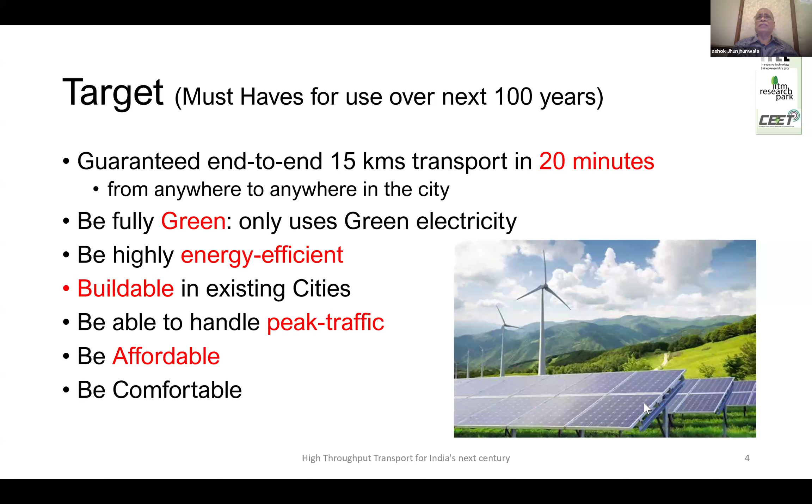So I'm looking at a transport system in 20 minutes, which can get you in the existing city using green electricity, highly energy efficient, and get from anywhere to anywhere in a very affordable manner. Almost looks impossible. But then it is the impossible that has to be made possible. Let me therefore try to present to you a solution which I believe can actually do this. We are calling this hashtag city, high throughput, autonomous, human transportation for India's next century. This is the kind of system that we really need to build.

What is behind this system? So for sustainability and comfort, we are actually introducing transport using pods. Pods are personalized, and in India, they will be air-conditioned vehicles. Maybe up to 2 passengers can sit in that. It should be comfortable, and this is the system which should be able to take us from anywhere to anywhere.

It should move on rails. Why? Because rails have low rolling resistance. It is 1/10 of that of the road. So anything that moves on the road will consume, as far as the rolling resistance is concerned, 10 times energy. We want to minimize the frictional loss, and therefore they should move on rails. And that's going to be the challenge.

The second, there are individual pods. Now, if the individual pods are moving at high speed, they will face fairly large aerodynamic drag. So we believe that these pods, which will be moving in the same direction, platoon with each other. They kind of join so that the aerodynamic resistance is faced mostly by the pod in the front, and much less by the pods which are in the platoon. And therefore, it minimizes the aerodynamic drag and therefore less energy consumption.

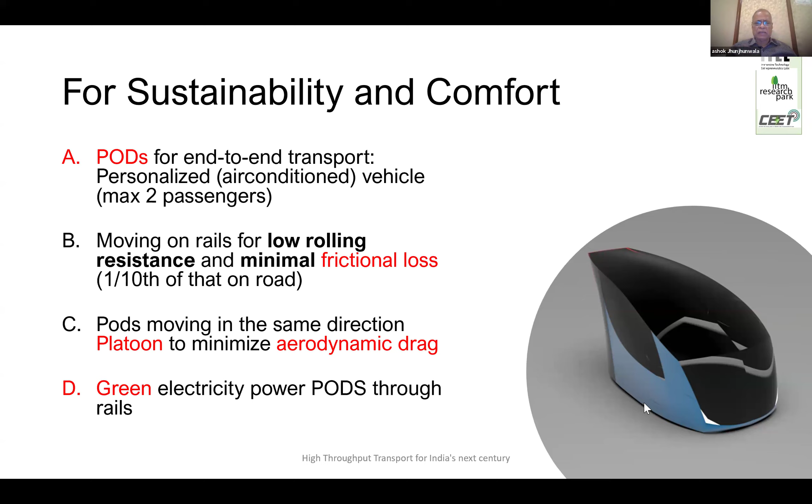Now, how do we really build this up? What kind of system are we talking about? We are talking about a dense pods transport system. We are talking about elevated corridors for transporting a single pod. Now, this pod's width is about a meter or even less than a meter. So it's a very narrow pod. Typically one person can sit, or two people can sit back to back. And therefore, it's a very narrow pathway we need to create on an elevated corridor, and I've shown here east-west and north-south, kind of forming a mesh network.

Now, the important thing is, since it's very narrow, this can be built on a narrow street as well as a wide street. Today, most vehicles try to travel on wide streets because that's where they can get speed. On a narrow street, they find it very, very difficult. But if it is an elevated, single pod, unidirectional rail system, then the pods on the narrow street can travel as fast as on the wide street. So essentially, we are looking at very narrow and wide streets, creating lots of paths for the pods to travel. And whether they travel on the narrow street or wide streets, they will have equal speed and capacity. That's the way they are built.

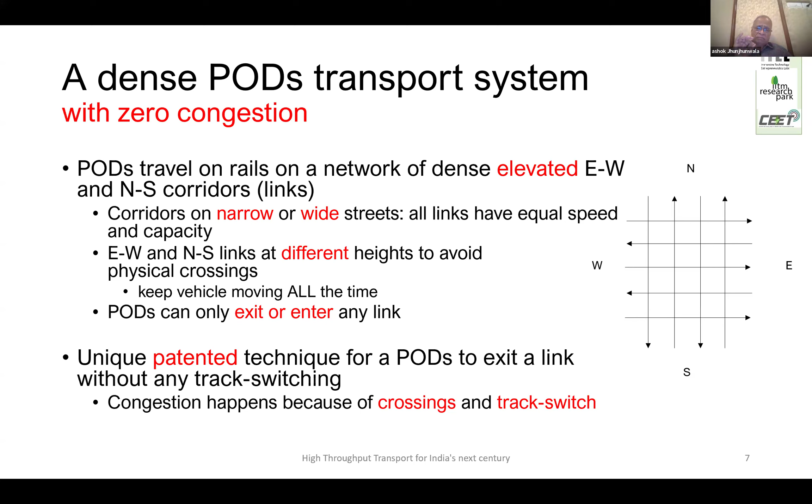We have come up with a unique technique where it is just like a car. When you are driving a car, you can just take an exit. Similarly, a pod can take an exit without any track switching. This is a very unique thing that we are able to do. And since we are able to avoid crossings and track switching, we essentially can keep on traveling at the peak speed. The pods are in constant communication with a centralized controller.

Now, these pods are autonomous. They don't have a driver, and there is a centralized controller which essentially gives them the route. There is a unique AI algorithm where, as soon as a passenger is to get onto a pod, the pod's route from end to end is decided. That is done by the centralized controller using an AI algorithm in such a manner that no pod will get into congestion.

In fact, no link will ever have traffic greater than 50% of the capacity, and therefore pods can continue to travel at full speed. Remember that they have to exit and enter another link. Exiting and entering will add a little bit of time, but otherwise they are just traveling at full speed. Pod journeys are autonomous once the route is downloaded. After that, pods are not controlled by the centralized controller.

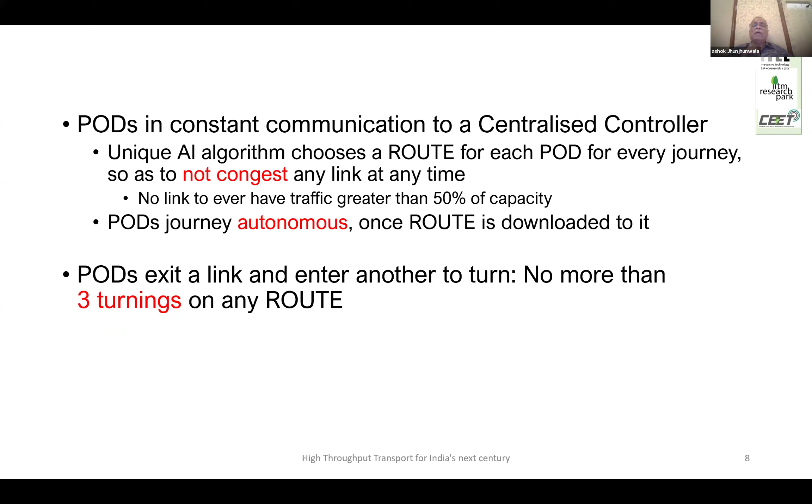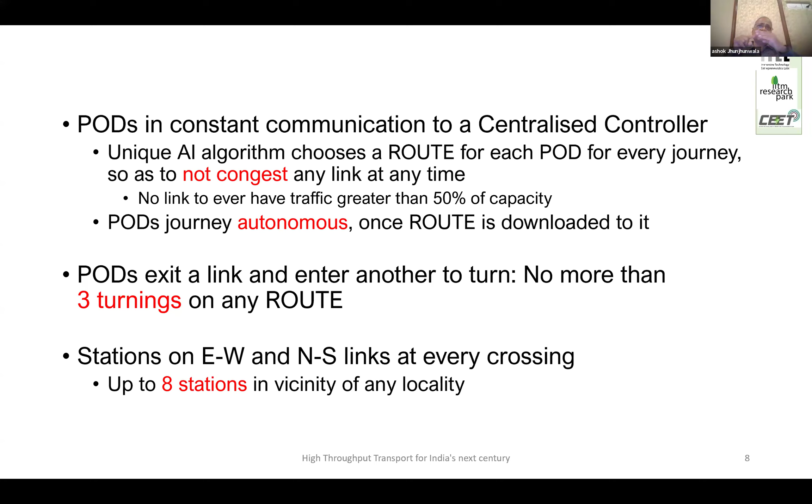Pods exit a link to turn. No more than 3 turnings on any route. We have put that restriction because any exit and entry does add a small amount of time, so we have set a maximum of 3 turnings. Stations are on the east-west and north-south link at every crossing. In fact, there are 2 stations at every virtual crossing. Remember, there is no crossing, but it appears like one, and there are 2 stations, one on the east-west side, another on the north-south side, and the pod can exit at either station.

So typically in a city like Chennai, 20 kilometers by 20 kilometers, we put a 30 by 30 grid-like rail network on existing roads. While we are showing them all as straight roads, it doesn't matter if they are curved or turn a bit. Basically, they'll form a grid-like structure at second floor height. Unidirectional, no crossing, equal speed and capacity on all roads, narrow as well as wide roads, and 2 stations at each node.

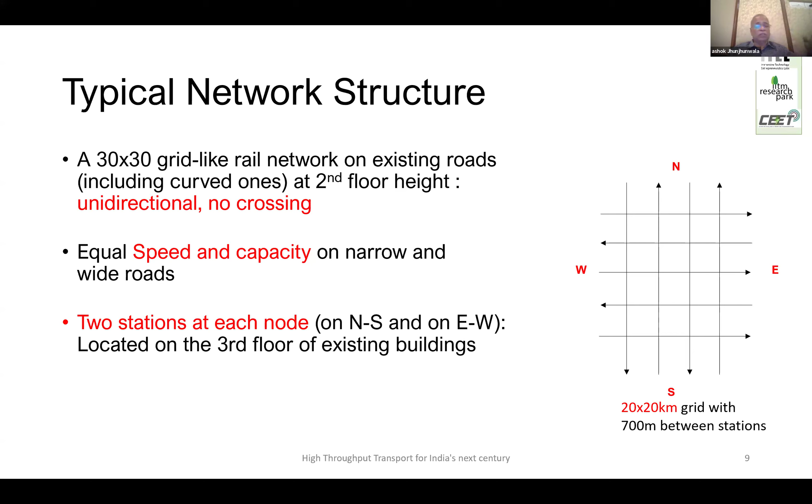The stations can be on a narrow road with buildings next to it, and one of the apartments in a building can be taken at the second or third floor of the existing building, which will serve as a station. So one will exit or enter a pod at the third floor of buildings marked to have a station. We are not talking about creating new infrastructure. You lease a flat in a building which has an elevator, so people can come to the second or third floor and enter or exit a pod.

We are talking about a user who, while leaving home, enters a destination on a mobile app. The app then figures out the complete route, communicating with the centralized controller, and directs the user to walk to one of the 8 nearby stations. Because wherever you are, there are 4 corners next to you, and there will be 8 stations. At one of the 8 stations, a pod will be available.

The user will be asked to walk about 300 to 400 meters, because the grid is 700 meters by 700 meters. This is the number we have chosen for Chennai. It is a 3 to 4 minute walk. The map will show the walking route, and as soon as you reach there, a pod is waiting for you.

A pod, then you enter the pod, and it travels 15 kilometers in 12 minutes. 75 kilometers per hour average speed. It goes up to 100 kilometers per hour. And in 12 minutes, it's able to reach a destination, 15 kilometers. And then again, 3 to 4 minutes walk to your office.

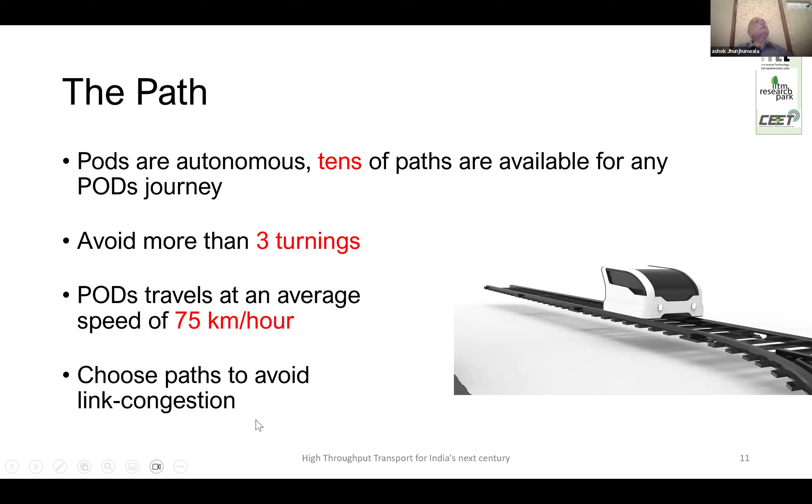So since stations are basically within 300 to 400 meters of every location in the city, this is made possible. As I told you, pods are autonomous. Tens of paths are available for any pod journeys. We'll show you. And avoid more than 3 turnings. Pods travel at an average speed of 75 km per hour. And the key thing is to choose a path to avoid link congestion.

So there are a large number of routes. There are actually many more routes. At least 10 routes. And if you allow 1 or 2 extra links, these are all equidistance links, probably there will be about 30 routes. Now remember that each turning adds to travel time. So for each route, a weight will be assigned. And the weight will depend on the congestion of that link. Each link will have a certain congestion.

Based on the congestion, a certain weight is assigned. And for every turning also a certain weight is added. And basically the problem at the central controller, it minimizes the weights of a route. The route which minimizes and ensures that not a single link is ever congested. In fact, if the link capacity goes more than 50%, the weight of that link becomes very high. So that link has to be avoided till it is freed.

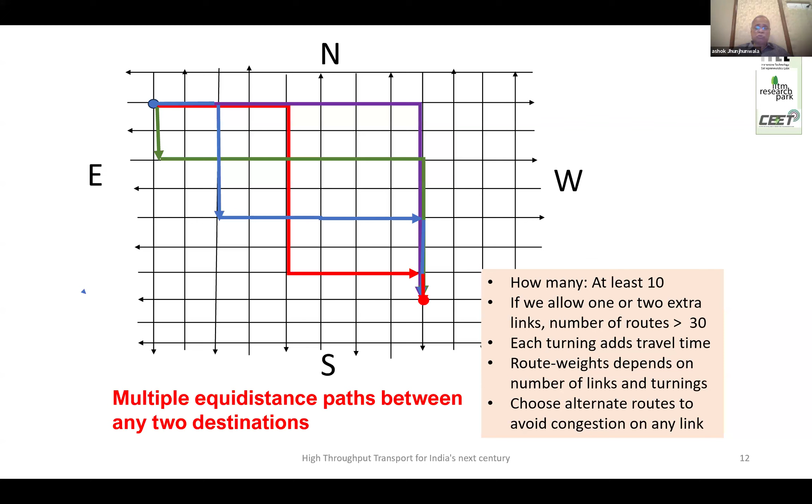So you actually calculate the path ahead of time and say you are starting at 6 p.m., but at 6:07, you are going to be on that link. There you see whether the link is congested. You look at the weight, choose the path accordingly. You keep choosing the alternate path, and there is absolutely no problem to get the right path.

So we are looking at a 30 by 30 grid in a 20 kilometer by 20 kilometer Chennai. And with the complete scaling, we are talking about 360,000 pod journeys that can take place in a peak hour. Even if you take 7-8 hours equivalent of peak traffic, we are talking about 2.5 million pod trips per day. And maybe two people can travel. So it can be anywhere from 3 to 4 million journeys per day.

Now, somebody pointed out that there may be some locality which is extremely congested and everybody wants to go there. Well, then the stations there will get congested and those areas will get congested. If you take a 4x4 grid, which is highly congested, you then subdivide it into 8x8. You create more paths. The grid is not 700 meters by 700 meters, but 350 meters by 350 meters. The number of stations increases and paths increase, and you can essentially quadruple the traffic in that area. The whole objective is never allow congestion to take place.

So we are talking about the current 2+ hours of commute traffic. We are talking about 75 minutes being reduced to 20 minutes. All the simulations have been worked out. A toy prototype has been built for something like this. And we have done a complete economic analysis. We are now doing a little better than a toy prototype, a scaled version of the actual system we are actually building.

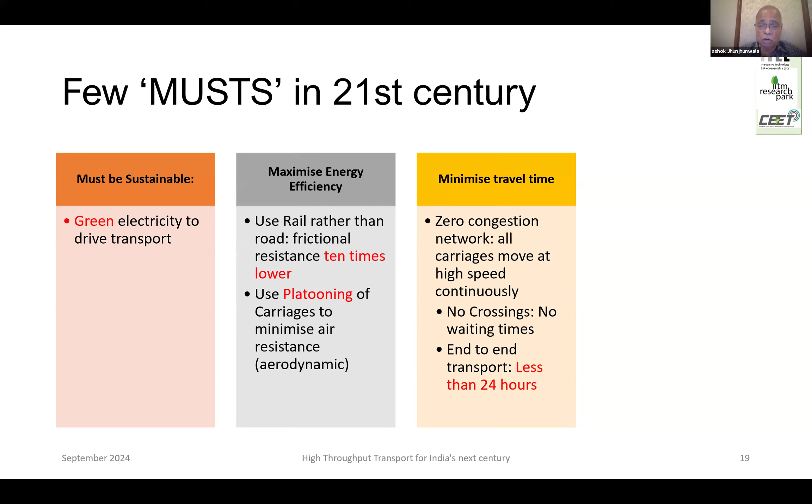Then we are talking about 24 hours travel time. And therefore, it has to be a zero congestion network, just like HASHTIC City. All carriages move at high speed continuously. So whatever rail network that we will create, there will be no crossing. Very similar conceptually. No waiting time because there is no crossing. And end-to-end transportation within 24 hours.

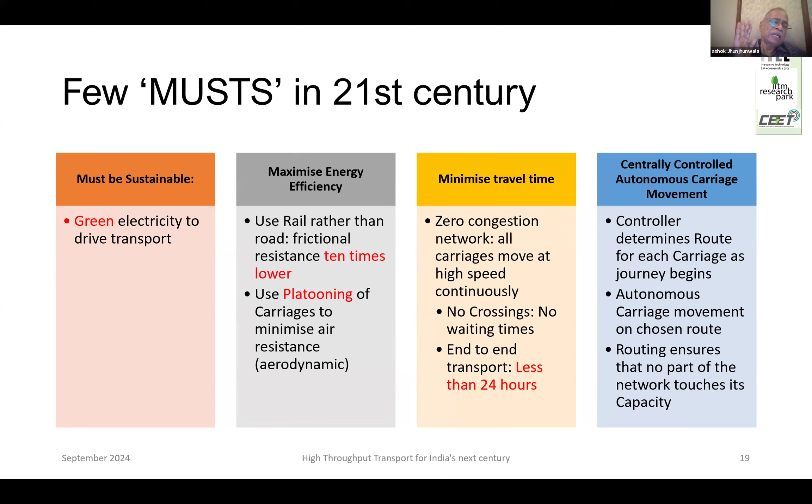And again, a centrally controlled autonomous carriage movement. The controller determines the route for each carriage. It's autonomous movement, so the carriage is not driven; only the route is downloaded to a carriage. Autonomous carriage movement on the chosen route. Routing ensures that no part of the network touches its capacity. In fact, it remains far below the capacity. So that concept is very, very similar.

So these HASHTIC goods are essentially traveling on existing highways, using elevated structures. For a single carriage, the width is approximately 3 meters, that of a truck. Not exactly 3, it's slightly less than 3, 2.5 meters or so. And this will move between 150 to, in fact, 225 kilometers per hour. Set up on elevated structures on existing highways. Again, unidirectional rail, structure width.

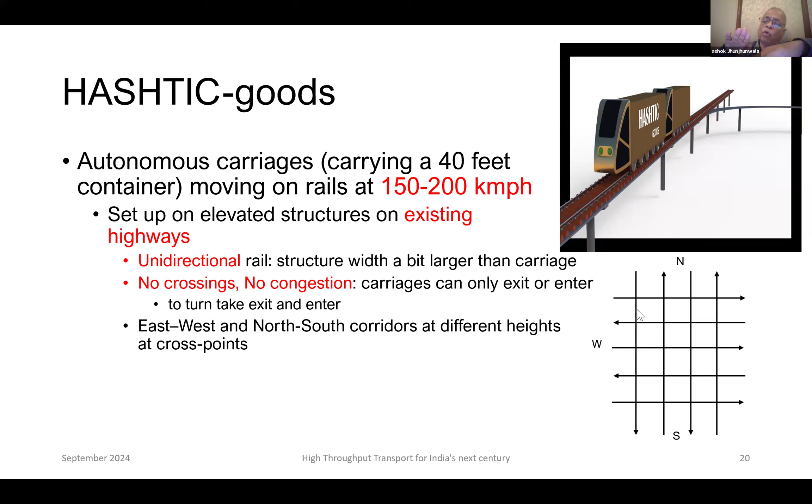So there are enough highways. So you choose wide highways, 4-lane, 6-lane, or 2-lane highway. It doesn't matter. You are going to create an elevated structure. And unidirectional. You don't try to do bidirectional. A little bit larger than a carriage, no crossing, no congestion. Carriages can only exit or enter. Except at cross points, they are at the same height, but when the cross point comes, one of them will go down, another will go up, so that they don't physically touch each other. You can, of course, exit one and enter another. That's the way we plan to do it.

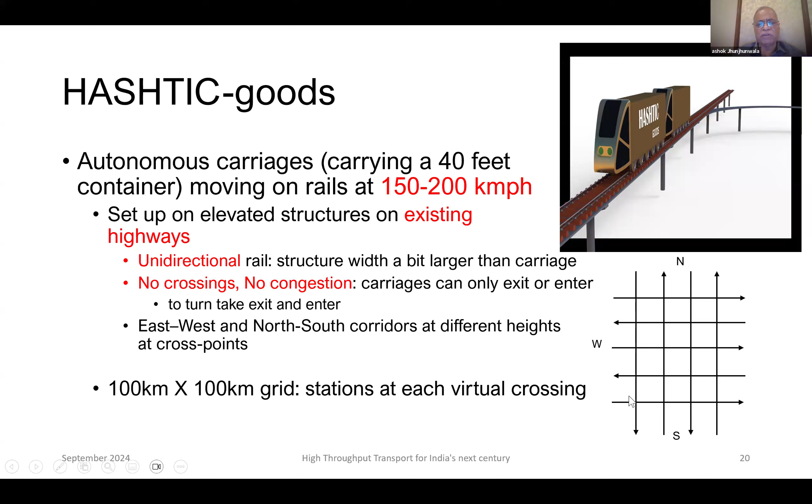And these are 100 kilometer by 100 kilometer grids. And there are enough highways. You can always choose highways where this kind of thing can be put. Not necessarily straight as we are showing, but a little bit of curvature doesn't really matter. End-to-end goods delivery in 24 hours. So we are again talking about the last 100 kilometers on an electric truck on both sides. In fact, you should be able to do end-to-end in less than 24 hours.

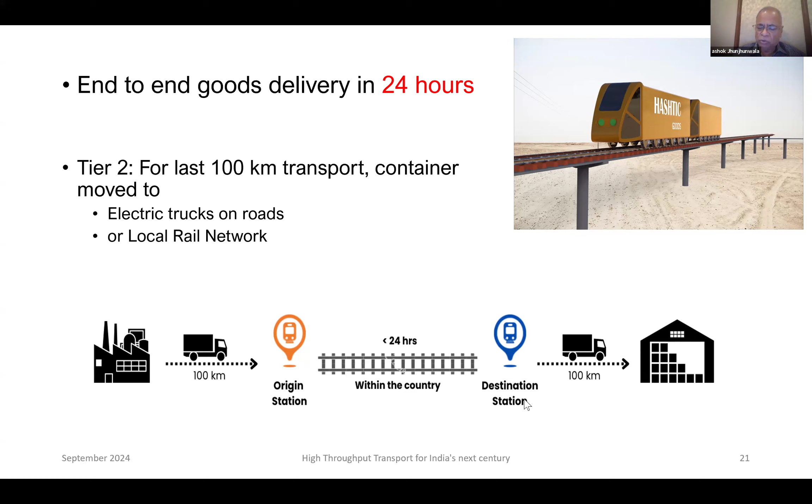This is the place where average speed will be 200 kilometers per hour. It is 175 to 225. So the average speed is 200 kilometers per hour, and 3,000 kilometers you essentially can travel in about 15, 16, 17 hours. And even if you have to take a slight bend and slight extra, it won't be very much. So this is the way we are talking about.

Carriage on rail: an autonomous carriage can carry a 40 feet container load. It will move autonomously. And as I told you, its speed is between 175 to 225. And the weight of the carriage, including goods, is 50 tons. 40 tons of load is put onto a carriage. So the container is 40 tons. Our trucks exist with 40 tons when one will move from there to this.

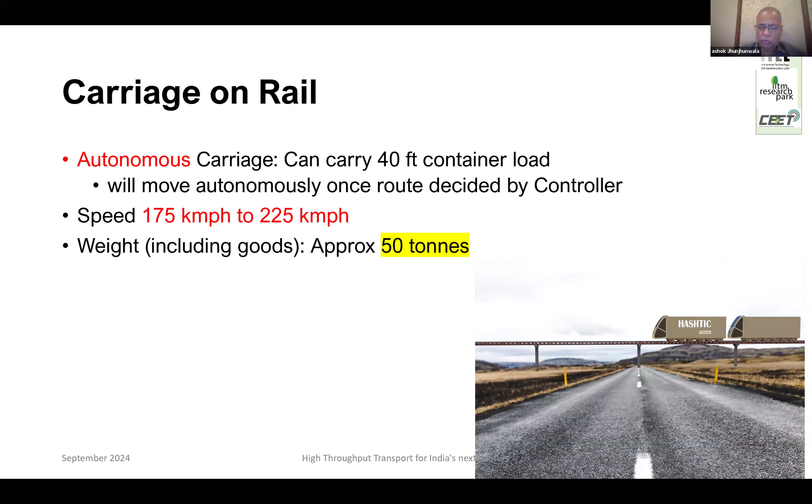And peak power, we have calculated around 750 kilowatt peak. Maybe distributed motors, so that it can help during failure also. Average power consumption of a carriage is 400 kilowatts. We need to really revalidate that. That's not certain. Powered through tracks. We put a battery backup in each of these. The battery backup is not primarily to transport, but if for any reason anything goes wrong, the battery backup will take you to the nearest 100 kilometer exit.

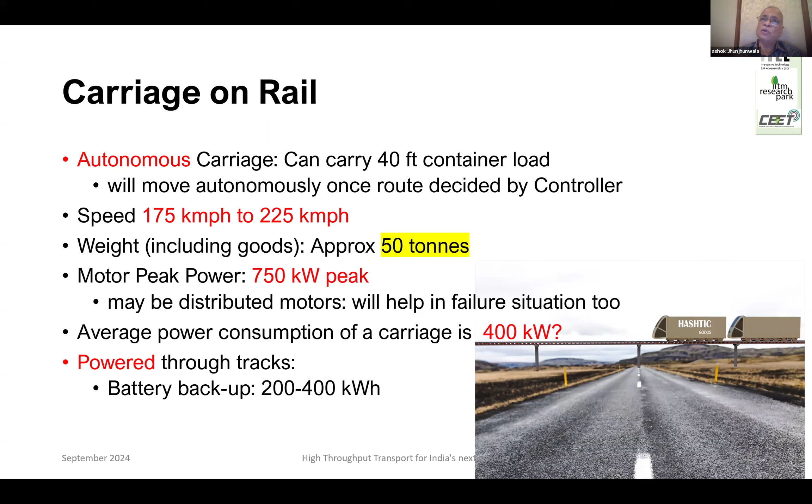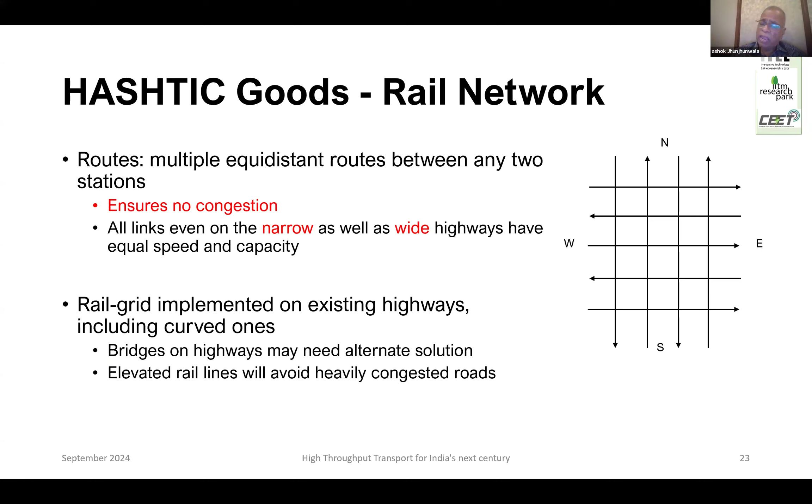Including curved ones. Bridges on highways may need some alternate solution. Elevated rails will avoid heavily congested roads. So whenever you come to an elevated, heavily congested stretch, you just move to another road, a parallel road.

Route: what are the innovations? First is the routing. A carriage's route is determined by a central AI system at the start of the journey. Routes are chosen so as to avoid congestion. In the next 16 hours when it is traveling, it will neither congest nor get onto a congested network. So you have to actually map the complete journey of every carriage and see that it is followed. And if for any reason anything goes slightly faster or slightly late, you recompute and inform every carriage such that there is no congestion at all.

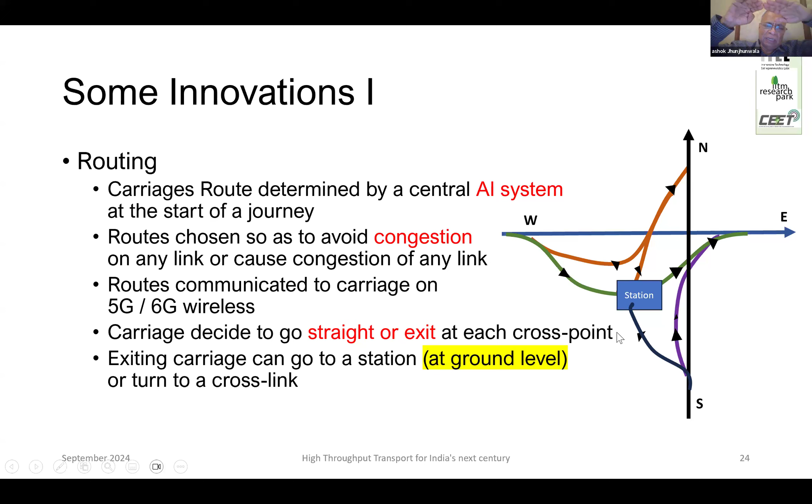Routes are communicated to the carriage on 5G, 6G wireless. So if you are coming out here, you can exit like this, or you can go from west to the north, or exit to the station and then go to the north, or from the station continue on to the east. Similarly, if you are coming from the south, you can go to the station and then go to the north, or directly go to the east, or go to the station and then go to the east. So all this is possible. The station is at the ground level, and this is at approximately 10 meters height.

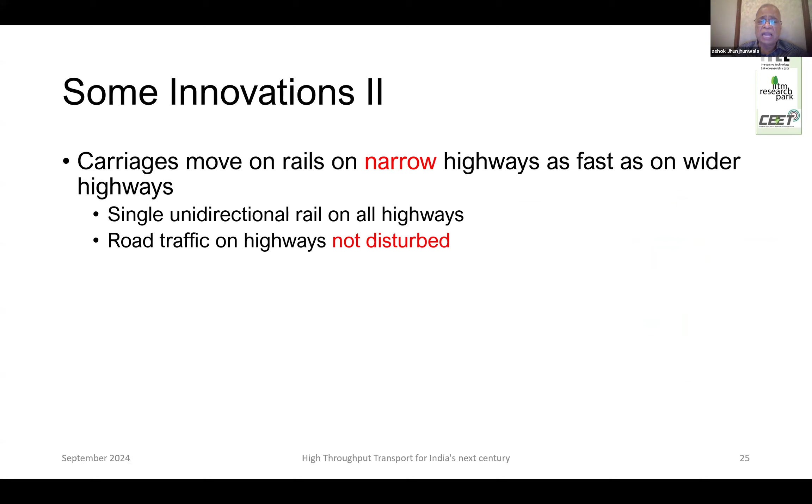Innovation number 2: carriages move on rails on narrow highways as fast as on wide highways. So a single unidirectional rail on all highways, and road traffic on highways is not disturbed. This is something on which a lot of engineering had to be done. So essentially something like this was possible. Still a concept, paper designs are being done, but every piece is being worked on.

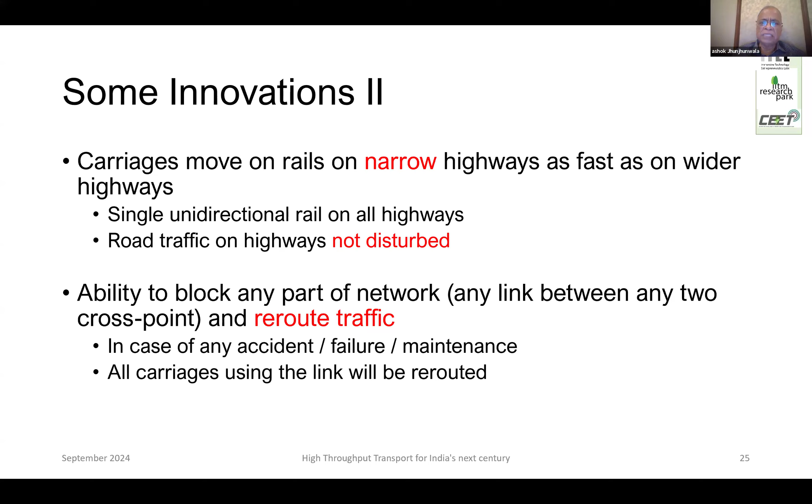If for any reason anything goes wrong near one part of the network, that part of the network is blocked and the traffic is rerouted. Because there are so many routes, everything can be rerouted. So in case of any link failure, accident, or maintenance, all carriages must be rerouted. All this is possible because of the centralized AI-based controller.

Tracks are fixed, no track switching for carriages to exit and enter. How does a carriage go straight or exit? In a car, we just turn, and since there is a continuous road, it can move. On rail lines, how does it happen? The carriage decides to actuate a lever to go straight or exit as per the downloaded route. Near the cross point, there are 2 guideways which will take the carriage straight or enable it to turn and exit. I'm not getting into the details of that. Patent is pending. If somebody is interested, we can get into the details.

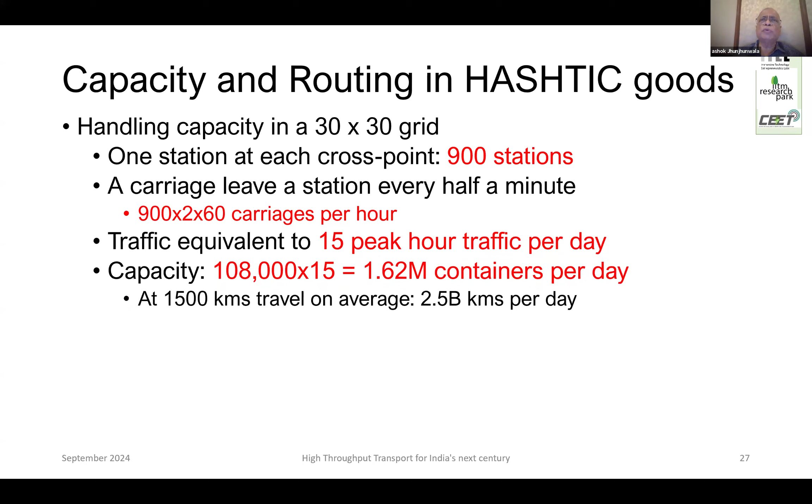Capacity. Again, in approximately 3,000 by 3,000 kilometers, we are talking about approximately a 30 by 30 grid. Every 100 kilometers by 100 kilometers, there is a station. One station at each cross point, so we are talking about 900 cross points. Assume a carriage can leave a station every half a minute, either in the east-west direction or the north-south direction, so there are 2 routes it can take. So in the peak hour, 900 into 2 into 60 carriages per hour. Assuming up to 15 peak hours, well, traffic will be distributed over 24 hours, but only a few hours will be peak. Equivalent to 15 peak hours, we are talking about 1.62 million containers per day.

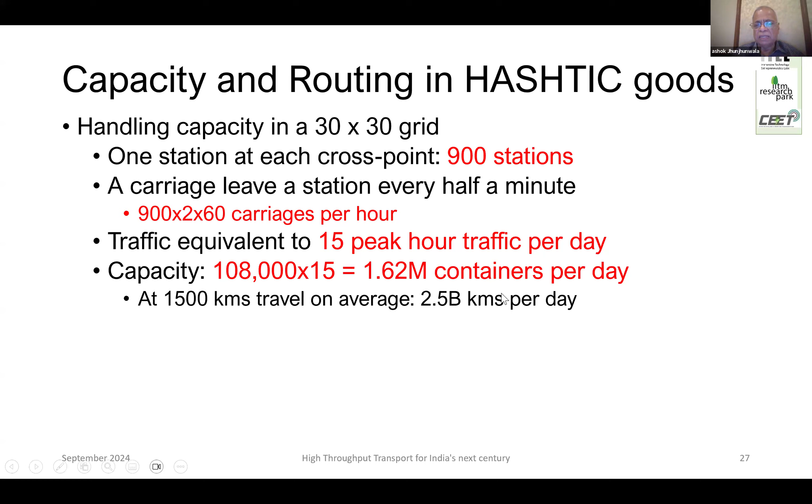At 1,500 kilometers average travel, assuming 50% of the total distance is average travel, we are talking about 2.5 billion kilometers per day. Today's truck traffic uses 300 million kilometers per day. So we are talking about 8 times more traffic capability and still ensuring that everything goes in 24 hours.

It is possible, leveraging technological innovation, to handle all future goods across the nation in 24 hours. One may not build the whole 100 by 100 network. One can start by building 300 by 300, because the total traffic today is not that high. But as the traffic continues to grow, you can keep on adding on existing highways. It can be highly energy efficient. Remember, it is only using green energy. The last hop is electric trucks.

Cost is being computed. And let me tell you, our first level cost cut is 40-ton truck freight. In a truck, it costs about 100 rupees per kilometer for 40-ton traffic. And for rail, it is 60 rupees per kilometer today. That's the tariff. These two things do not include the cost of infrastructure.

Road is built by government using tax money, and the trucks don't have to pay for it. Similarly, the rail network is built by taking tax money, and the rail department doesn't have to pay. Whereas our target, including the cost of infrastructure and depreciation at 10% interest, will be 50 rupees per kilometer, and still traveling within 24 hours.

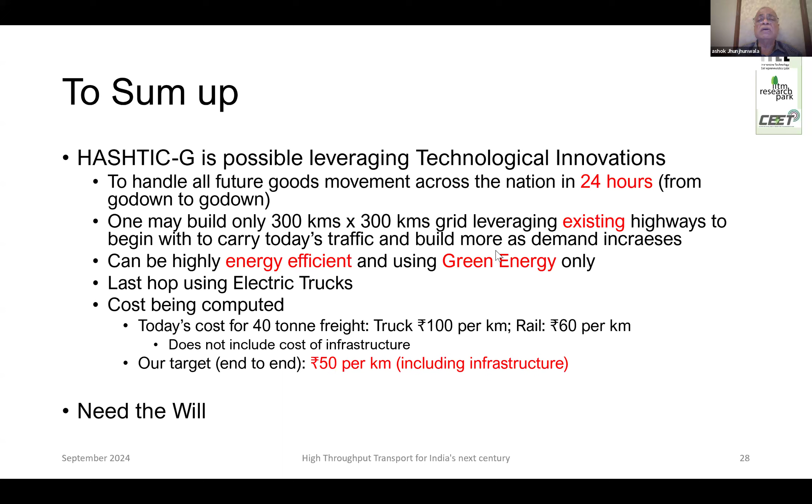One for a congested city, another for a congested goods transport network for the country. It can save a huge amount of money. It can become totally green. And by moving goods within 24 hours, efficiency will become very, very high. Thank you very much. I will stop here.